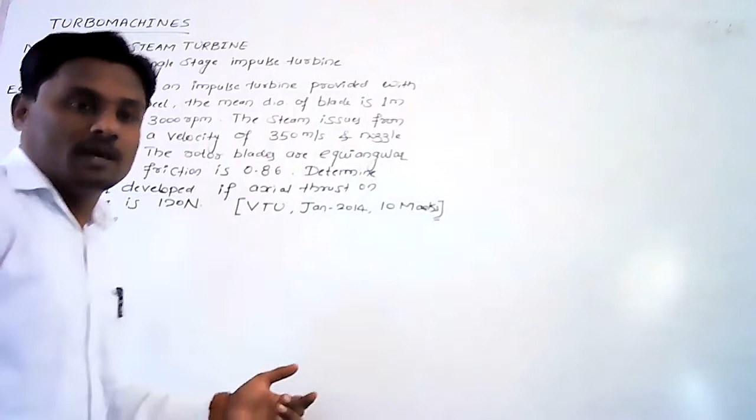After reading the problem carefully, let us try to write down the given data. Write down the solution. First, it is the single stage impulse turbine.

Now, it is provided with a wheel. The wheel diameter is 1 meter. Diameter of wheel, represented by capital D, equals to 1 meter.

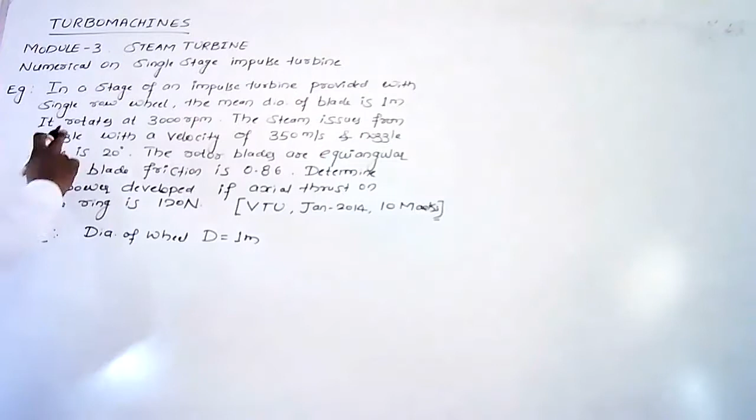Next, the rotation speed of wheel is 3000 rpm. Rotation speed, represented by capital N, equals to 3000 rpm, that is revolutions per minute.

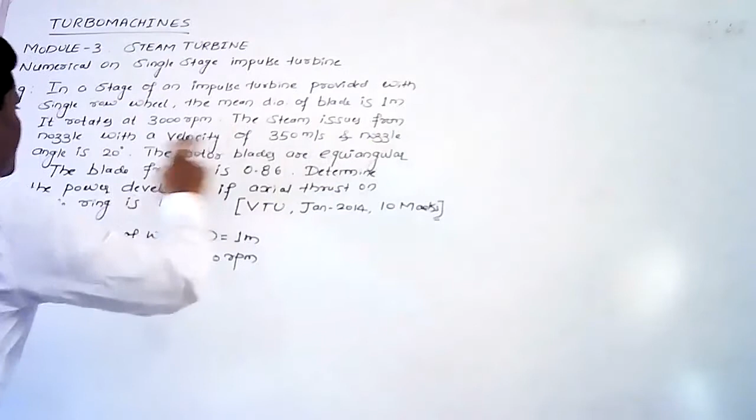The steam issues from the nozzle with a velocity of 350 meter per second. The velocity of steam coming out from the nozzle, or the velocity at which it hits the blade, is nothing but V1. It is represented by V1. You can say it as exit velocity of steam from the nozzle, or absolute velocity of steam at which it hits the first row of moving blade.

This type of turbine, being a single stage impulse turbine, will have only one set of nozzle and one set of moving blades. So the absolute velocity of steam at the inlet of moving blade, or outlet from the nozzle, is represented by V1. Steam velocity V1 is given by 350 meters per second. The nozzle angle is represented by alpha 1, which equals to 20 degrees.

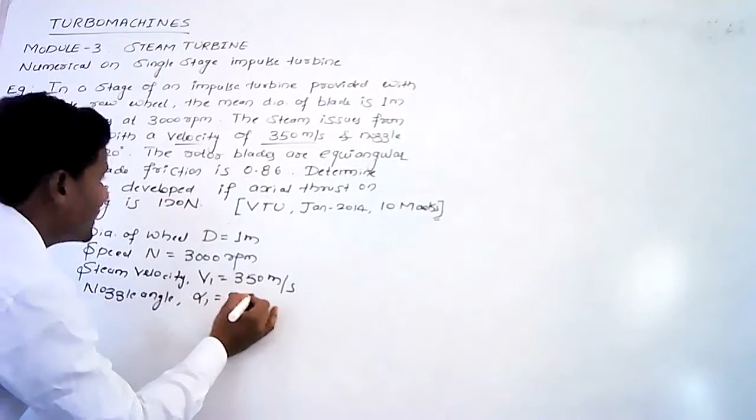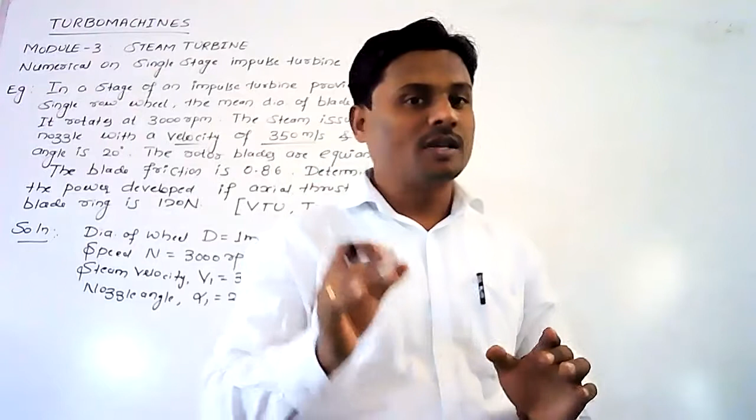The rotor blades are equiangular. The moving blade angle is represented by beta 1 and beta 2 at the inlet and exit respectively. In question, if it gives equiangular rotor blades, then you are supposed to take beta 1 equals to beta 2, because they are equiangular. Equiangular in the sense the inlet angle equals the outlet angle for the moving blades. So you are supposed to take beta 1 is equals to beta 2 here.

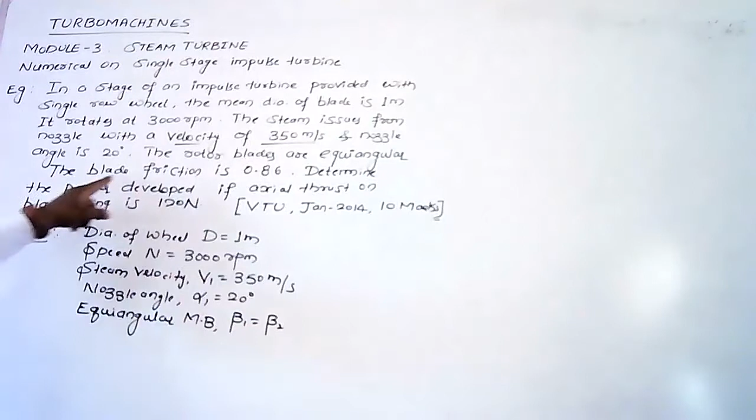Next, the blade friction is 0.86. Blade friction, or the coefficient of blade, is represented by CB. So CB is nothing but the ratio of VR2 by VR1, which is nothing but 0.86.

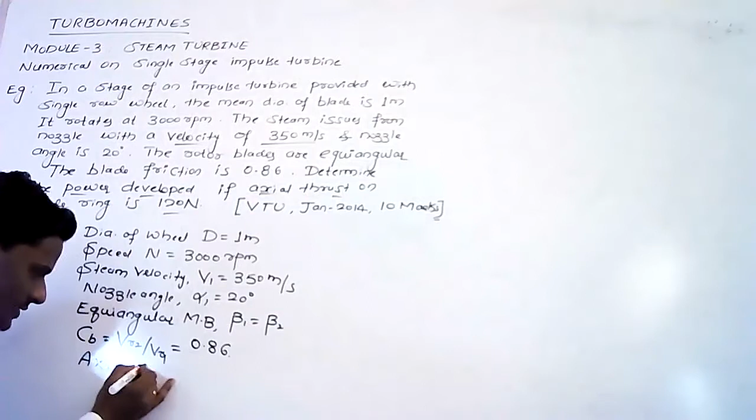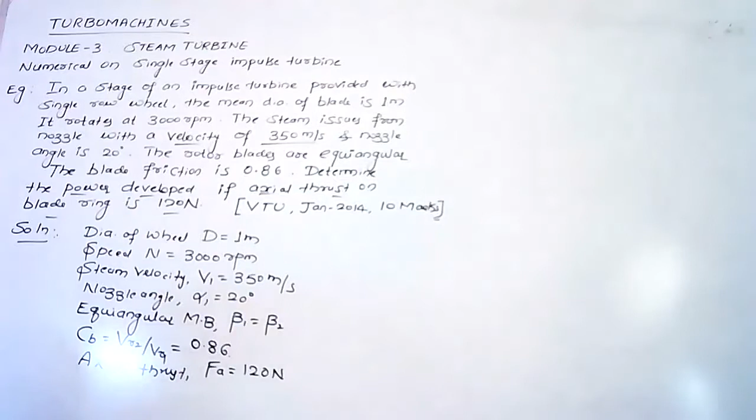Next, what is to be determined here? We need to determine the power developed if the axial thrust on the blade ring is 120 newtons. So axial thrust is given, represented by F suffix A, which is nothing but 120 newtons. Here we need to find the value of power P.

So this is the given data. Now for the solution of this particular problem, we can use a graphical method. In order to solve by the graphical method, before going to the solution, we have to draw the combined inlet and outlet velocity triangle. Let us try to draw the combined velocity triangle. It is totally a rough sketch, which can be used as a reference for the graphical sketch.

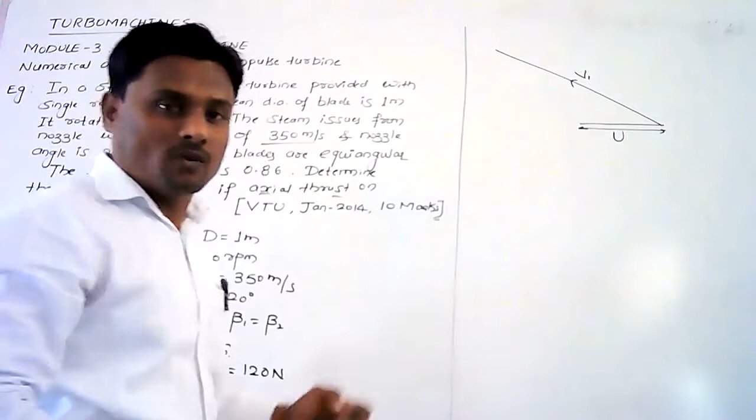This is the absolute velocity V1. V1 is the absolute velocity of steam at the exit of the nozzle, and it is inclined at an angle of alpha 1 with respect to horizontal. It has two components, namely vertical and horizontal component.

Just join these two points. So this will be the relative velocity component VR1. VR1 is nothing but the relative velocity component. Due to the friction between the steam and the inner surface of the blade, this component comes, that is the relative velocity component at the inlet.

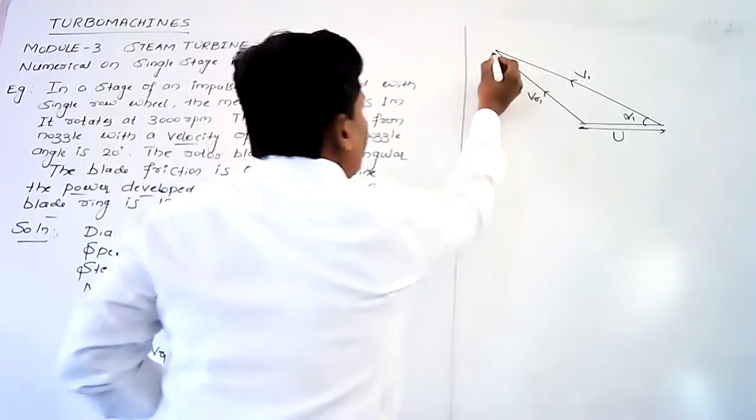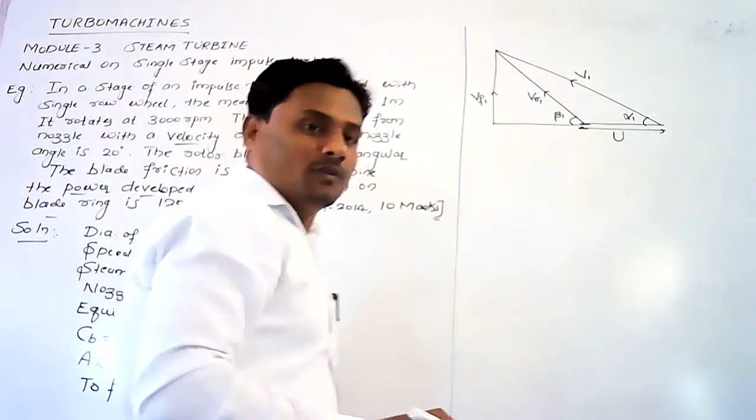Now the vertical component of V1 is VF1, and join these two points. So this will be the inlet velocity triangle, and of course beta 1 is the angle made by VR1. So remember, for V1 it's alpha 1, for VR1 the angle is beta 1. The horizontal component of V1 is VU1, the tangential velocity component. So this is the complete sketch for the inlet velocity triangle.

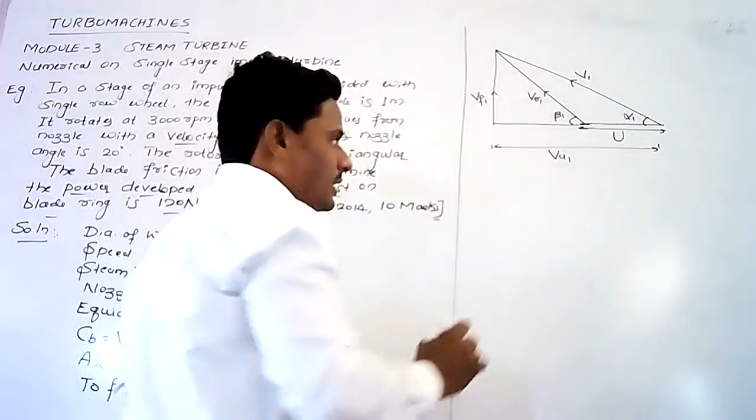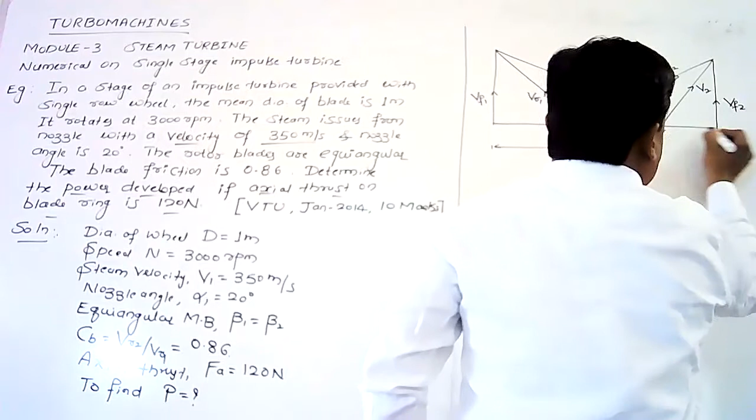Now similarly, we can draw the outlet velocity triangle. This principal diagonal is VR2, the relative velocity component at the outlet. This is the absolute velocity at the outlet, V2, and its vertical component is Vf2, the flow velocity component at the outlet, and similarly this vector is Vu2, the tangential velocity component at the outlet. So V2 makes an angle alpha 2 with respect to horizontal, and Vr2 makes an angle beta 2 with the horizontal.

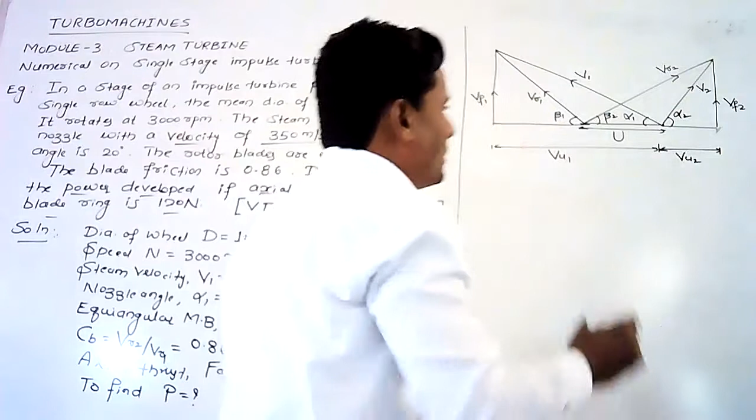The algebraic sum of Vu1 and Vu2 is delta Vu. Okay, name all the points A, B, C, D, E, and F.

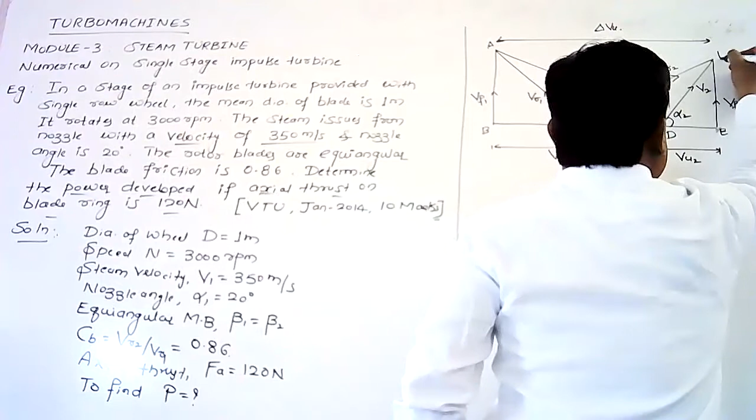Now this will be the reference figure to draw the final sketch on graph paper. Now we can proceed for drawing the combined velocity triangle in your graph paper.

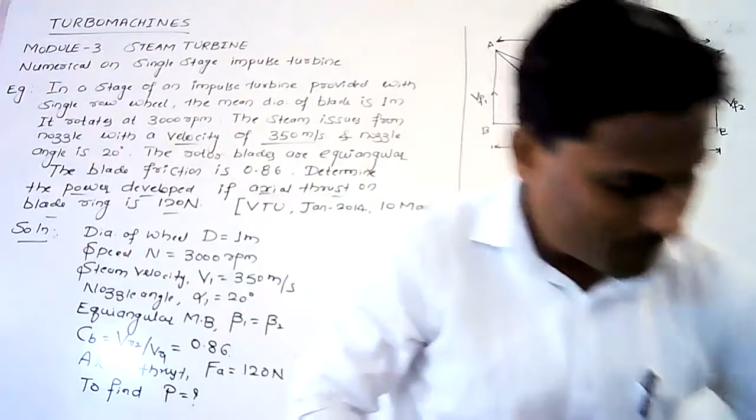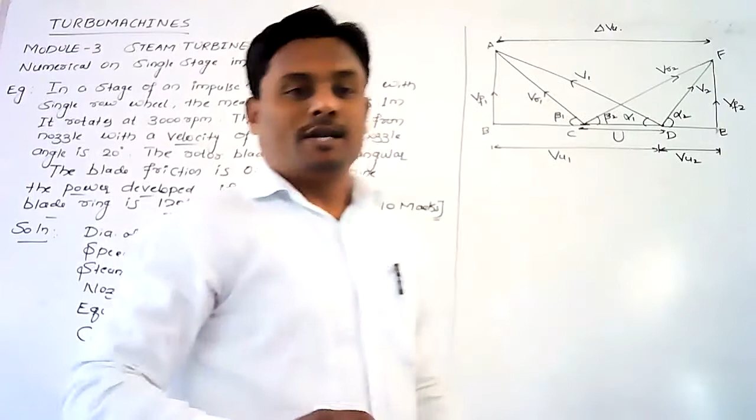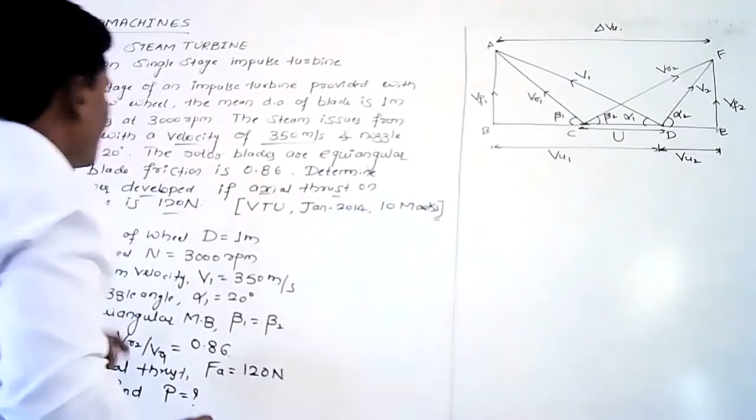Now let us try to draw the sketch, or the combined velocity triangle, on graph paper as per the scale. So let us adjust the scale first. Now here the speed is given, n equals to 3000 rpm, and diameter is given, d equals to 1 meter.

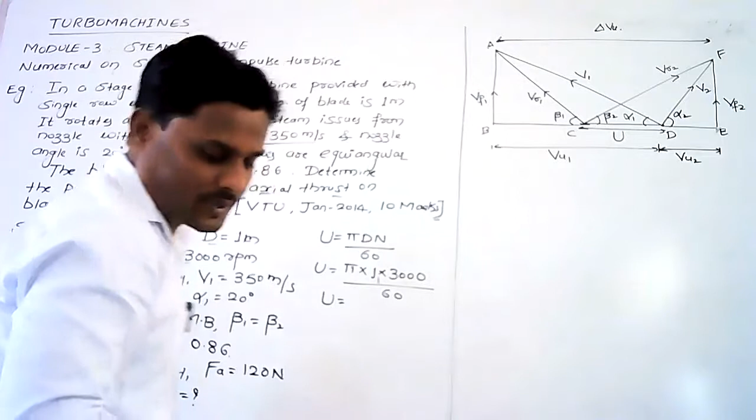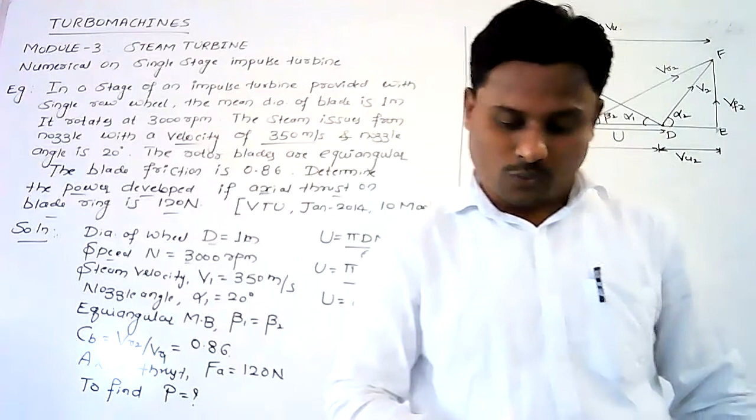So therefore the tangential velocity u is given by pi d n by 60. U equals to pi d n by 60. Substitute the values: pi into d is 1 meter, into the speed is 3000 rpm, divided by 60. So the expected value for u is 157 meter per second. This is a value for the tangential velocity u.

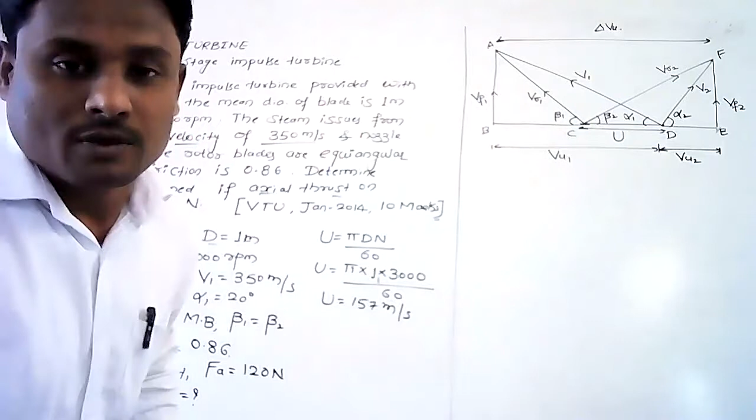Now here we have to take an appropriate scale. The value of u is 157 meter per second. So let us take an appropriate scale to convert the dimensions from meters per second to centimeters. Let us take the scale.

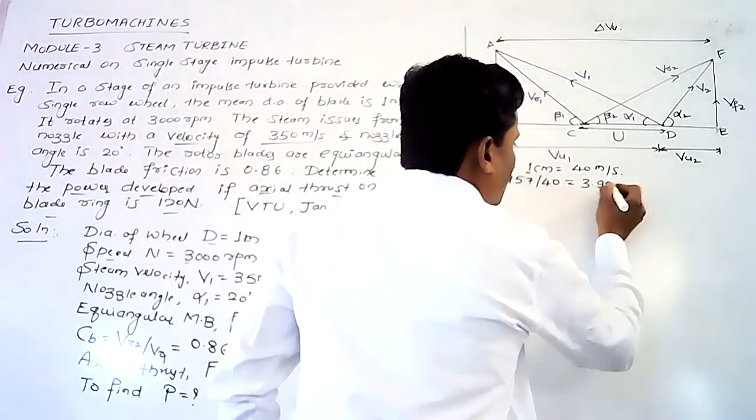Scale: 1 centimeter equals to 40 meters per second. Then the value of u in terms of centimeter is 157 by 40, which gives 3.925 centimeters, and approximately you can take it as 4 centimeters also. Because this is a graphical method, we can't take the exact dimensions in your graph, so you can take 4 centimeters. It is acceptable.

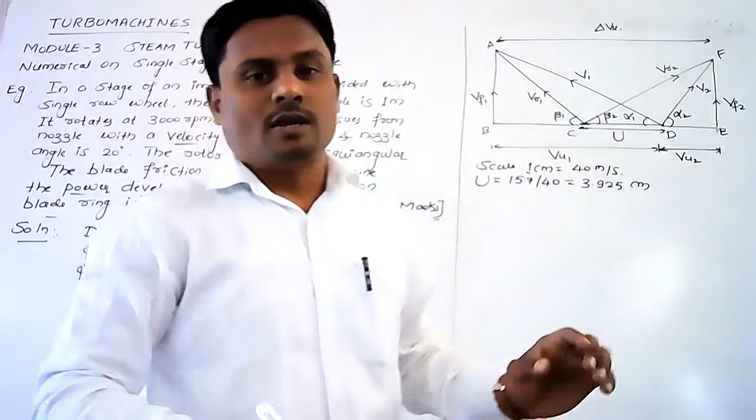The plus or minus 0.1 centimeter error is acceptable, right? Now first we have to draw the line CD on a graph paper. Just try to draw the line CD here. So CD, or u, equals to 3.925 centimeters. This is 3.925 centimeters here.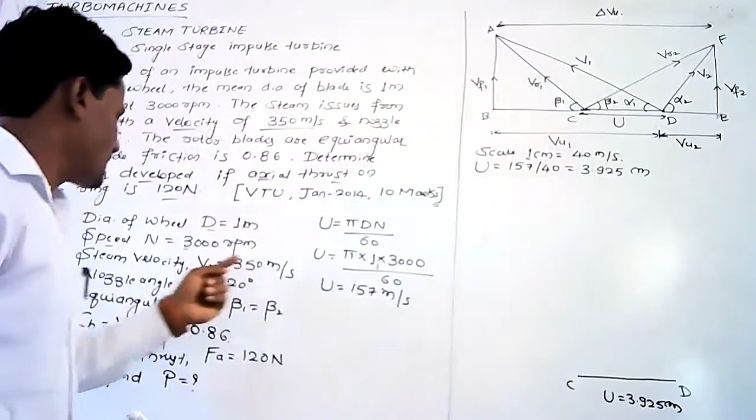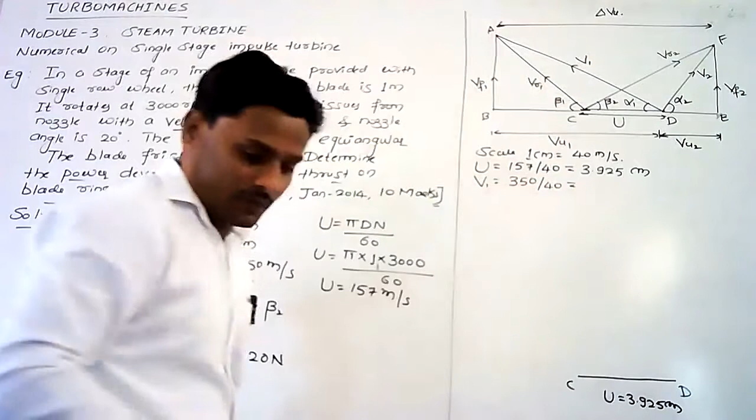Now from point D, V1 is emerging. So V1 is given, the velocity V1 is given as 350 meters per second. So the velocity V1 is 350, but in terms of centimeters, 350 by 40, which is 8.75 centimeters.

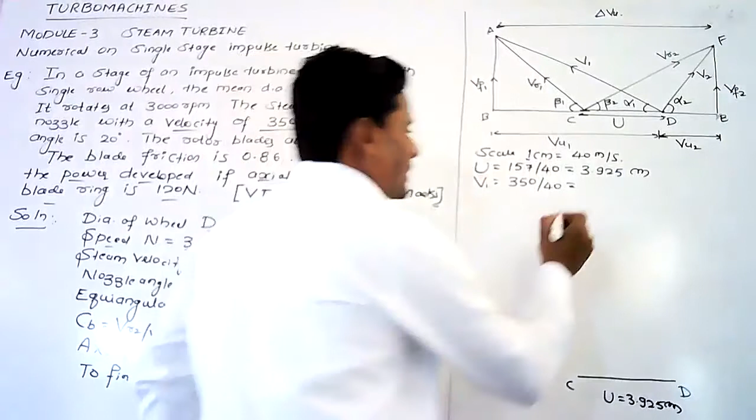8.75, this is in centimeters. Okay, then take it as 9, no problem. So the angle alpha 1 is 20 degrees.

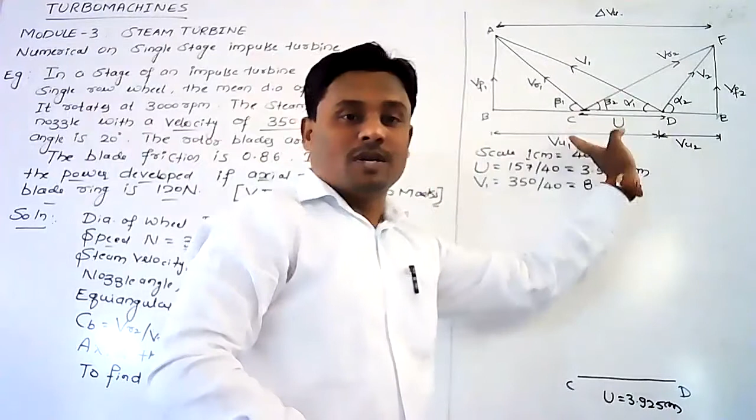Keep the protractor on point D and measure the angle in clockwise direction, because alpha 1 is measured in clockwise direction. So alpha 1 is 20 degrees and the length is 8.75 centimeters.

So you will get the point A here. This is the velocity V1. V1 equals to 8.75 centimeters and alpha 1 equals to 20 degrees.

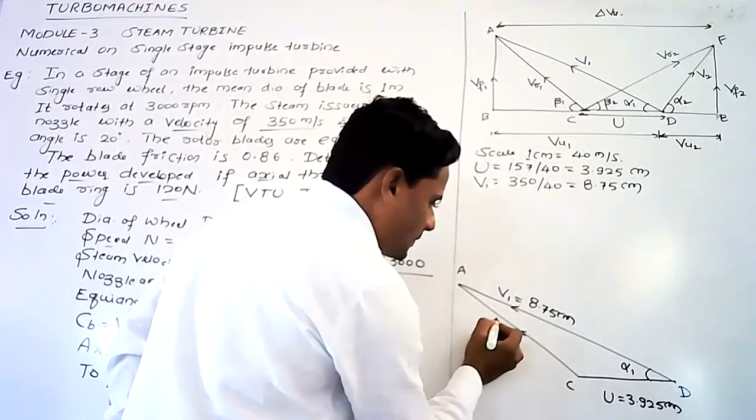Now join AC here. This will be VR1. And from A, drop a vertical line up to B here. This is VF1, the flow velocity component VF1. This is a point B here.

Now join DC, and this will be the angle beta 1 here. So we can solve it further.

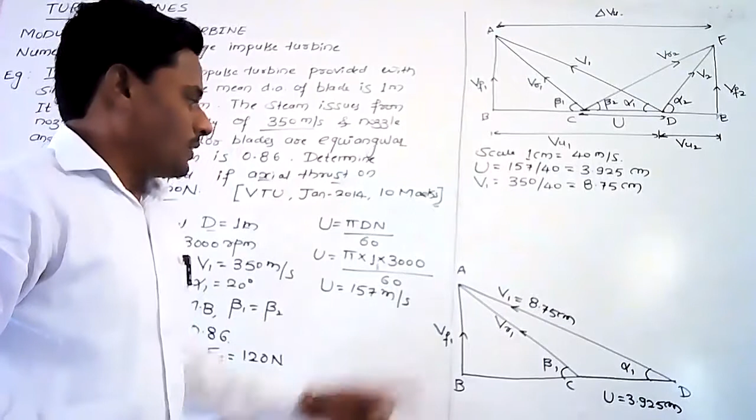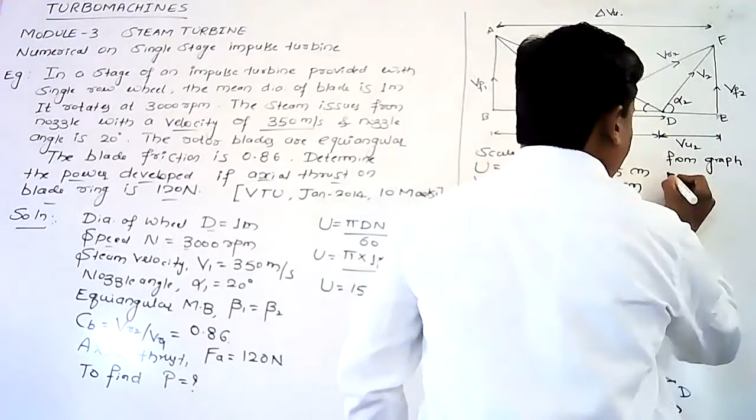From graph, we have to measure the magnitude of VR1, the length of VR1 in terms of centimeters. So you can write here, from graph, the length VR1 equals, the length VR1 in terms of centimeter, which I got is 5.1 centimeters.

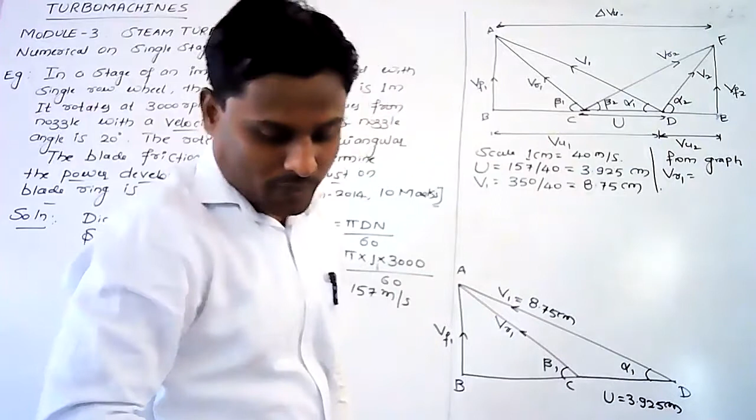5.1 centimeters. And if you multiply with 40, you'll get it in terms of meter per second. It's very clear. VR1 equals to 5.1 into 40, that is 204 meter per second.

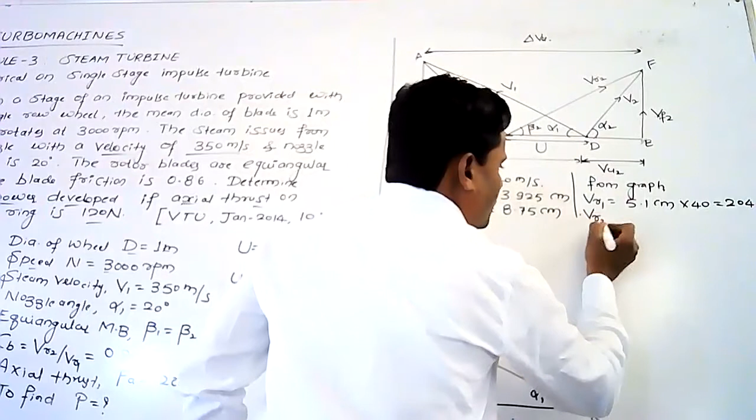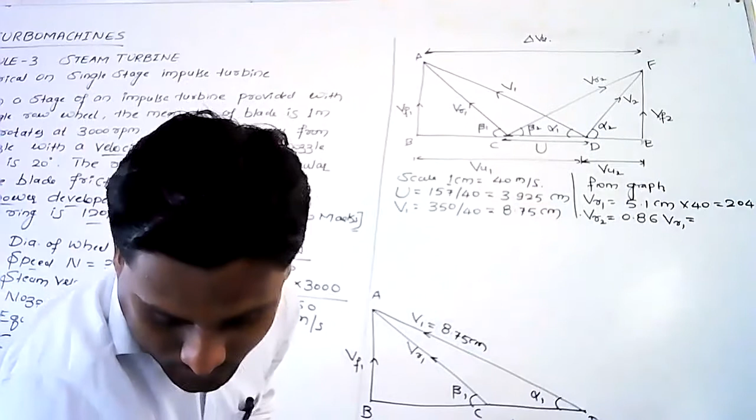Now you know the ratio, VR2 by VR1 equals to 0.86. So VR2 equals 0.86 times VR1. Just multiply 5.1 into 0.86, in terms of centimeters you'll get it as 4.4 centimeters. So I have rounded off the value to 4.4 centimeters.

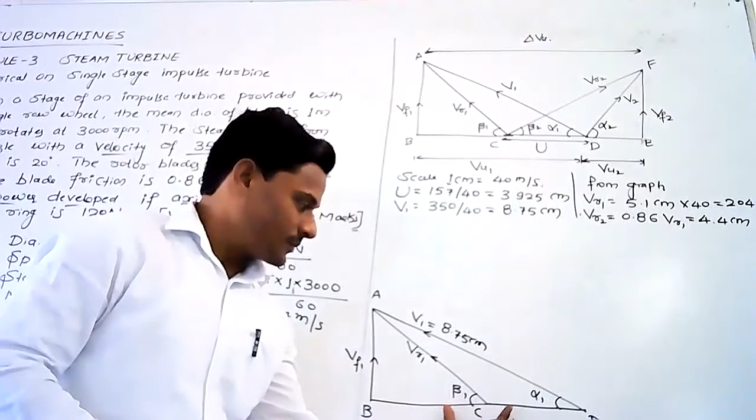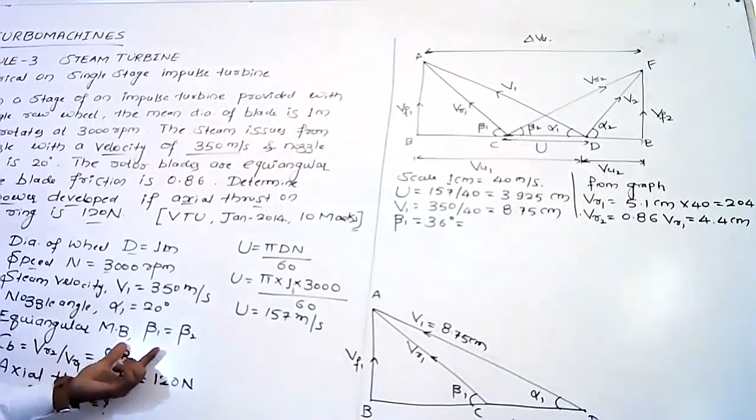Similarly, by using the protractor, you can measure the angle beta 1. Keep the protractor on point C and measure the angle beta 1. So the value of beta 1 is 36 degrees. And as we know that the blades are equiangular, beta 1 will be equal to beta 2.

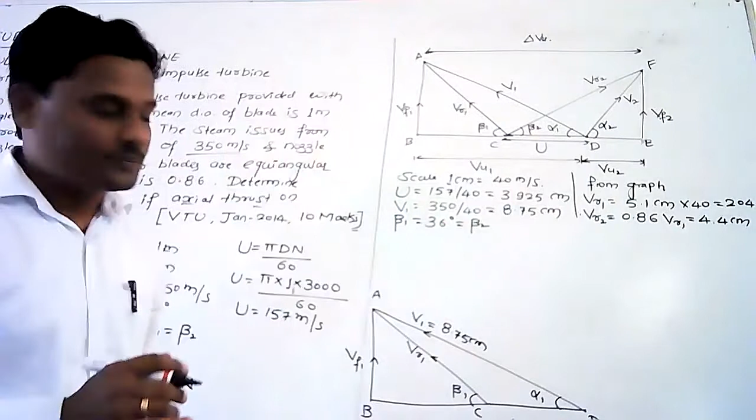So here you can write beta 2 as it is, since the blades are equiangular, so beta 1 equals beta 2, that is 36 degrees. So from point C, VR2 is emerging at an angle beta 2.

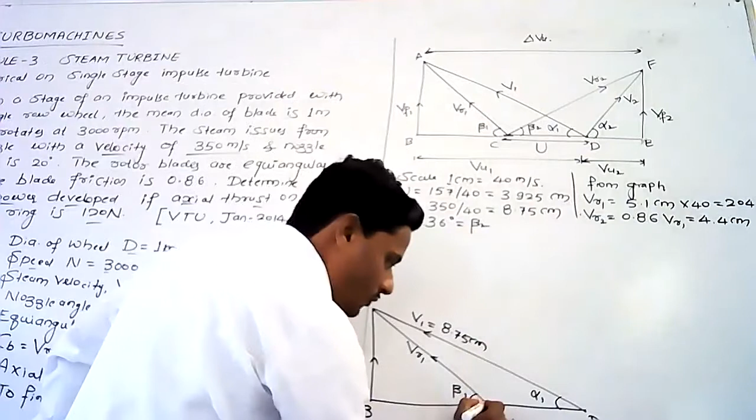Keep the protractor on point C and measure the angle in counterclockwise direction, that is 36 degrees, and take the line VR2 equals to 4.4 centimeters. So VR2, you'll get the same diagram.

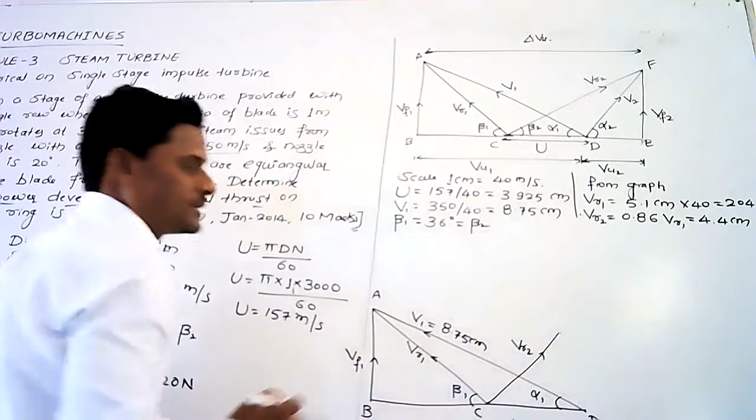So this is of course point F here. This is the exact figure as per the scale, and this is a rough sketch. The rough sketch may be different from the actual, from what we have drawn on the graph as per the scale.

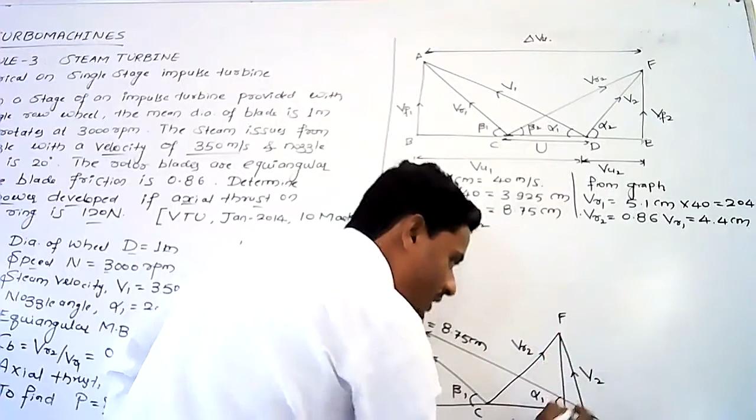Okay, now just join FD. This will be V2 here, and from F, just drop a vertical line, so that is VF2, the flow velocity component.

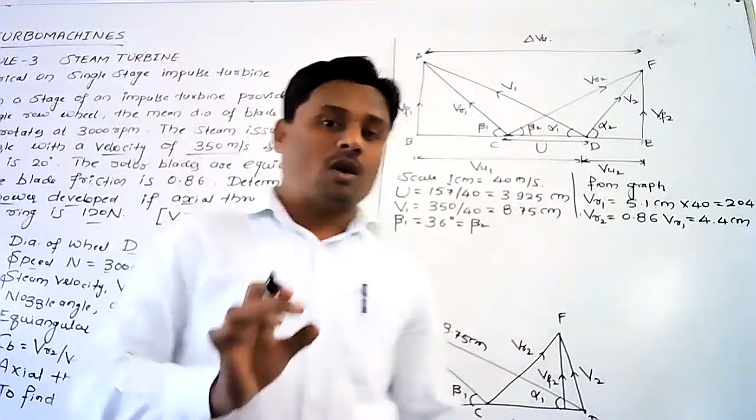Remember, students, VF1 and VF2 are always vertical in nature, they are the axial velocity component, whereas VU1 and VU2 are horizontal components, they are always horizontal in nature.

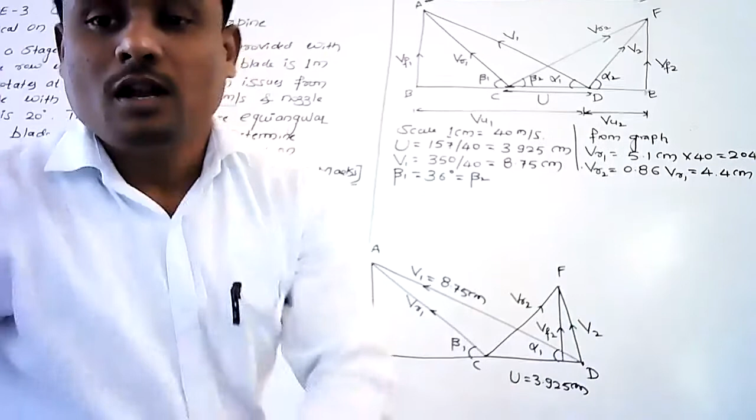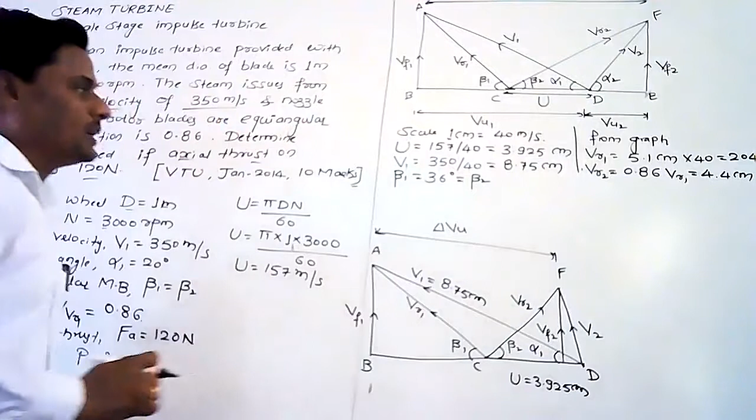Now let us proceed for the next important step. So this complete vector is delta VU1 or delta VU here, and this is beta 2. And this vector, this complete vector, is VU1 already, which we have taken as VU, delta VU.

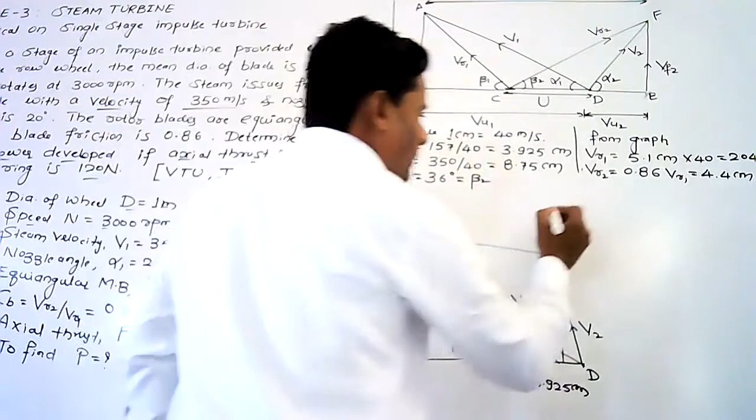Now what we need to calculate here? We need to get the value of the power P. So for power P, we know the formula: m dot by Gc into U into delta Vu.

M dot by Gc into U into delta Vu. This is a formula to calculate the value of power P. But we don't know the value of m dot.

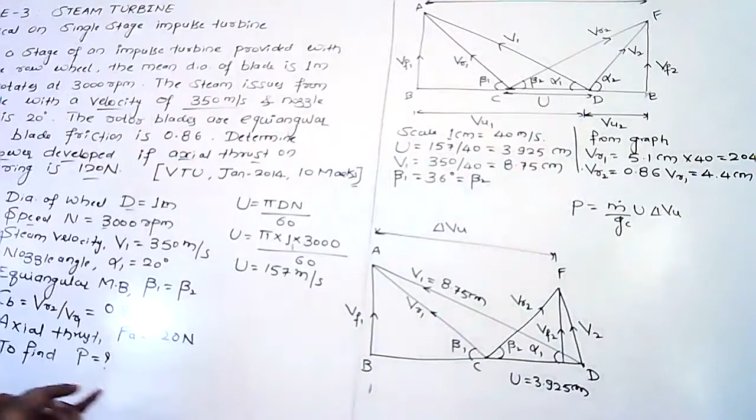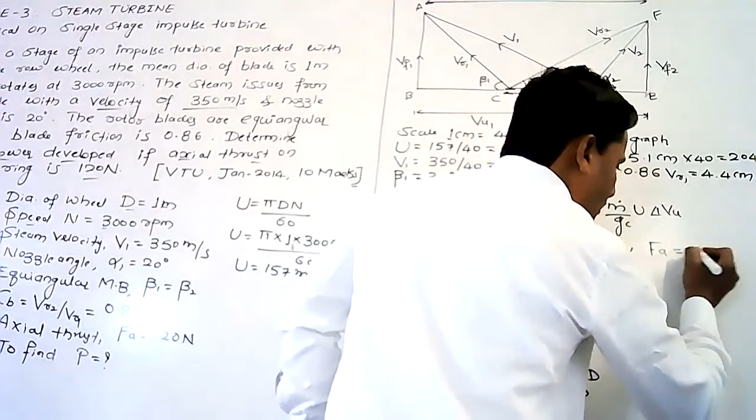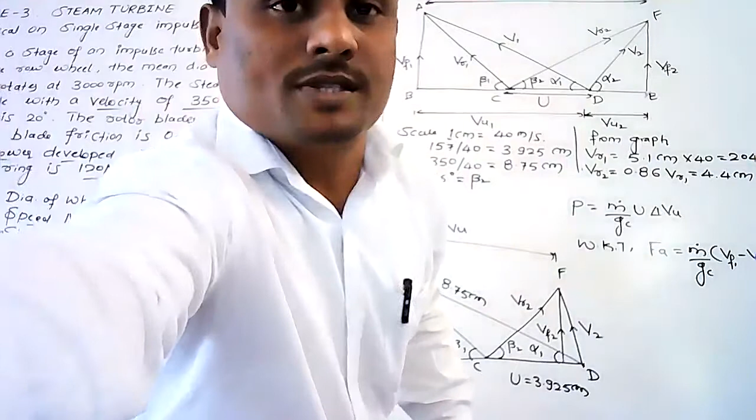Here he has given the value of axial thrust, 120 newtons. So we know the formula for axial thrust. The axial thrust Fa is given by m dot by Gc into Vf1 minus Vf2. So m dot is obtained from Vf1 minus Vf2 here.

Now from the graph we can measure Vf1 and Vf2, in terms of centimeters. Or else you can measure the total length of Vf1 and Vf2 and just take the difference between them. The difference between Vf1 and Vf2 is delta Vf.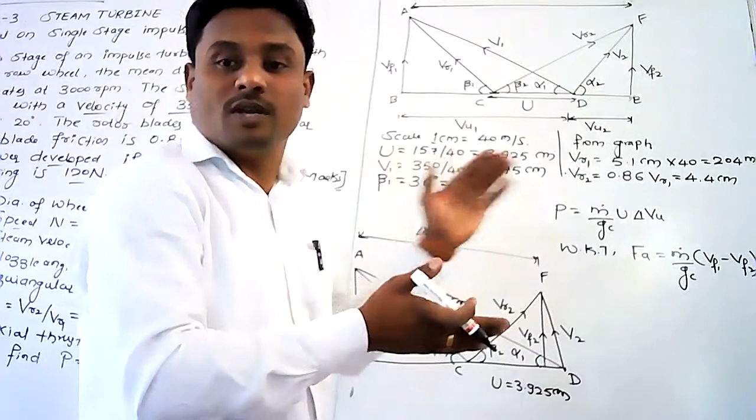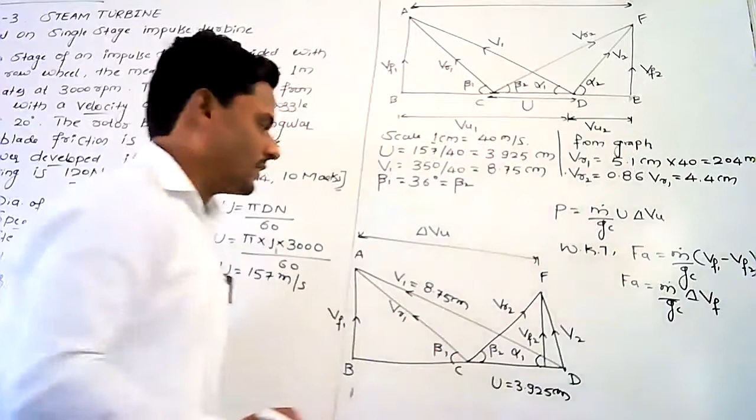So Fa equals m dot by Gc into delta Vf, which is the gap or difference between Vf1 and Vf2. Let me draw here: this is Vf1, this is Vf2, and the difference between these two is delta Vf. Now the difference between Vf1 and Vf2 is 0.45 centimeters.

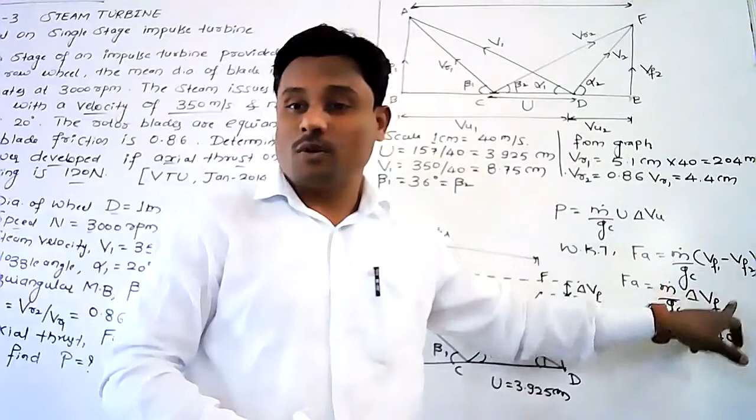0.45 centimeters. And if we multiply this with the scale, that is 40, because while substituting in formulas, we have to convert the velocity into meter per second, not in centimeters. So mandatorily we have to substitute the value of velocity only in terms of meter per second, not centimeters.

This is the important thing. So the product is 18 meter per second. So let us substitute the value of delta Vf, that is 18 meter per second, in this formula. Now Fa is 120.

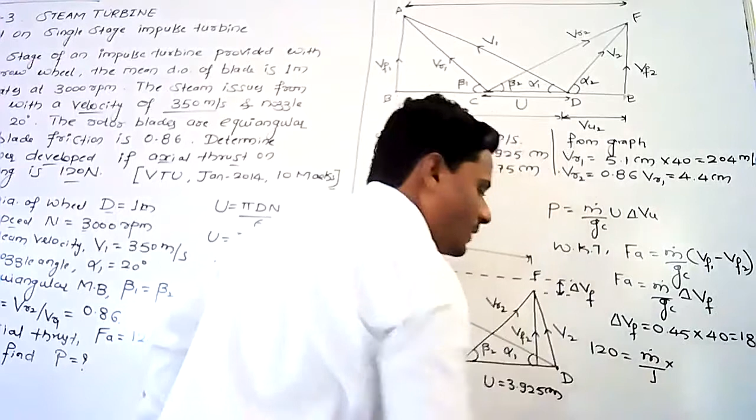Fa is 120 newtons equals m dot, as it is unknown, divided by Gc which is 1, and delta Vf is 18 meter per second. So the value of m dot will be equal to 6.67 kg per second. This is the value for mass flow rate.

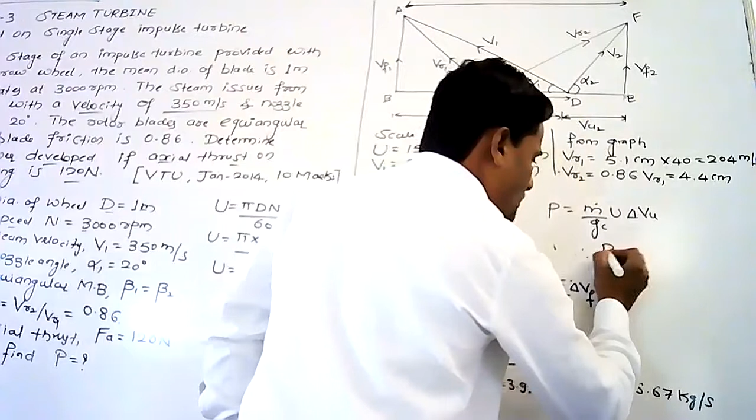Now we have to substitute the value of mass flow rate in the power equation to get the value of power P. Let us substitute the value of m dot in this equation. m dot is already known, 6.67 kg per second. So therefore, the value of power P equals m dot, 6.67, divided by Gc value which is 1. Now U is 157 meter per second.

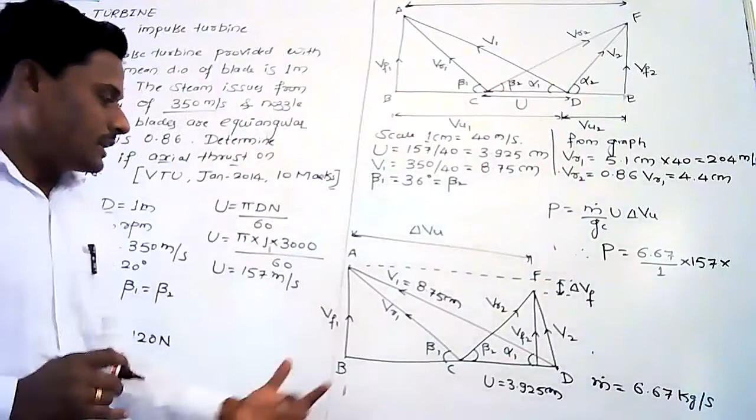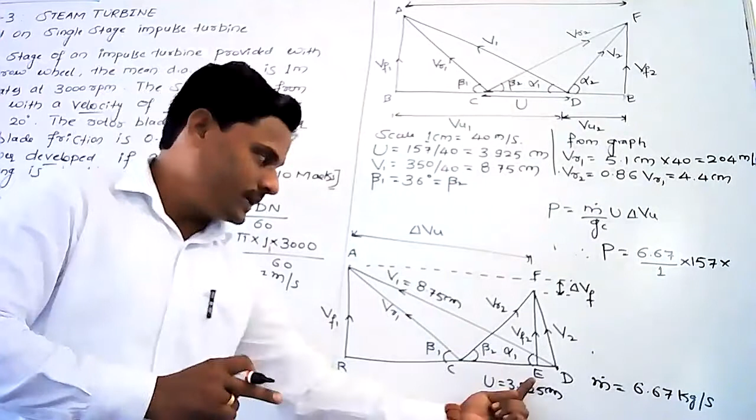157 into delta VU. The delta VU is the total difference between B to E, because delta VU is nothing but the parallel distance between Vf1 and Vf2. You should be very careful here: delta VU is the total gap, the total length of the line from point B to E, gives you delta VU.

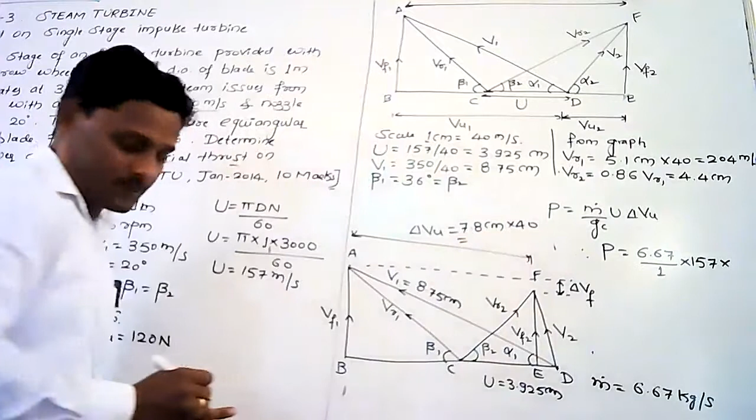So delta VU, if you measure using the scale, is approximately 7.8 centimeters. If you multiply it by 40, you get the velocity in meter per second, which is 312 meter per second.

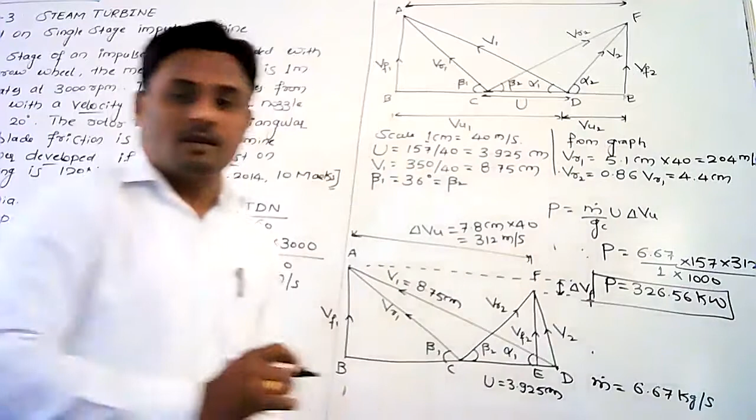And if we divide the complete term by 1000, you will get the power P in terms of kilowatts. The approximate value of power P is 326.56 kilowatts. So this will be the answer for the unknown power P.